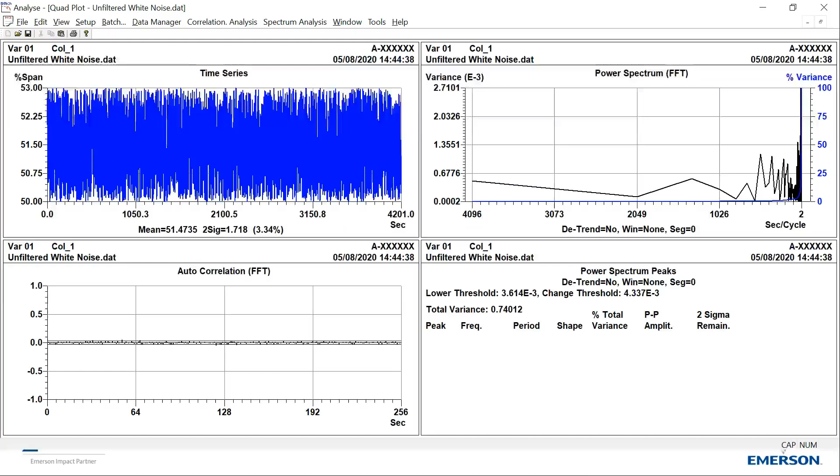So let's talk about noise itself. I'm going to use what's called the EnTech toolkit. So what are we looking at here? The upper side is the actual time series, the actual data as I collected it. What I actually did there is I just used the random function in Excel and imported it.

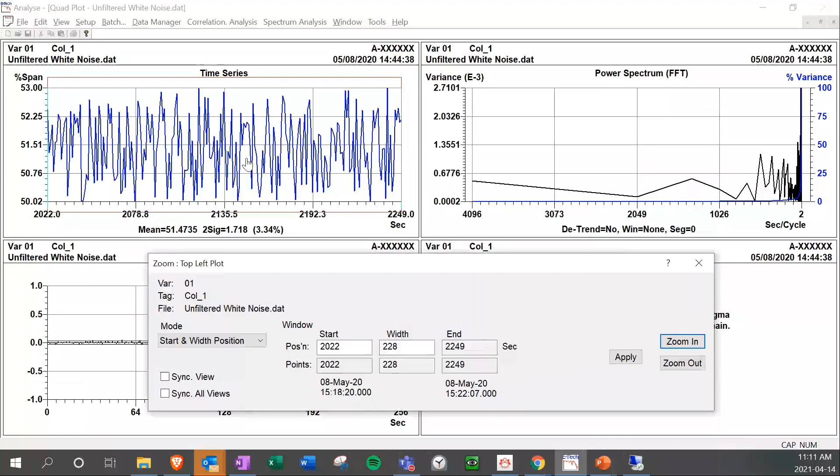You can see obviously here there's over 4,000 data points. I can zoom in if I want to, and there I just zoomed in, and you can actually see the actual variations of the signal right there. So let me zoom back out.

The quadrant on the upper right-hand side, that's called the power spectrum. And here we did a fast Fourier transform. You can do a fast Fourier or full Fourier. I'll explain why we're going to need this to determine the degree of noise here. But first, I want to explain what the fast Fourier will calculate.

Mr. Fourier said back in 1807, if I'm not mistaken, that any kind of time series can be reproduced by using a series of sine and cosine waves and adding them all up. So here we're actually dissecting it, looking at it in the frequency domain, and breaking it down to its fundamental harmonics.

Now, it looks kind of strange here because you can see that it crowds to the right-hand side. And that's because in the process control world, we deal with very slow cycles. It could be a 5-minute cycle, a 20-second cycle, a 1-hour cycle. That's why we tend to plot it in seconds per cycle, which is the inverse of frequency. You talk to reliability people, vibration people, they deal in hertz.

So what I'm going to do here is change the plotting, and go linear frequency as opposed to linear period. And you can see here now all the frequencies, all the harmonics, are equally spaced. I'll explain that blue line in a minute.

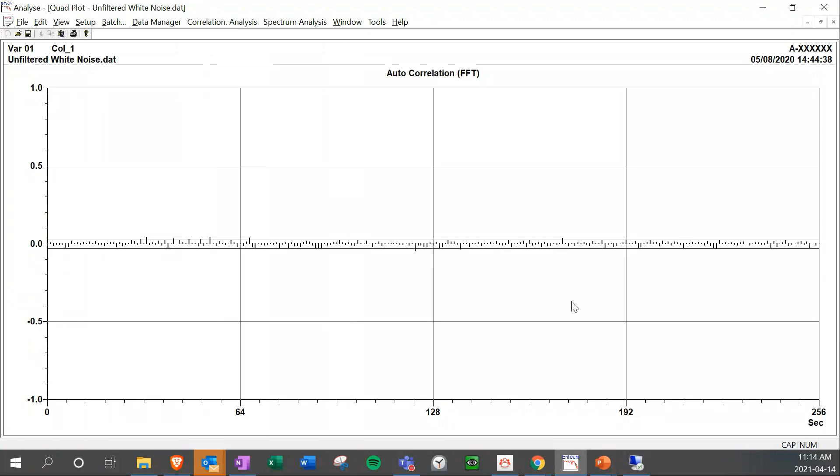So it's another indication that the signal is random and pure noise. One last thing I want to explain to you here is the blue line. So the blue line is actually the integration of all the actual harmonics being present within the power spectrum.

Now, there's a term called white noise. And white noise refers to when we actually see the color white, we actually are seeing all the colors in the visible spectrum at the same time. And so we can apply that to the signal. Here we're seeing equal amount of harmonics all across the spectrum. And so we see a straight line being applied right there.

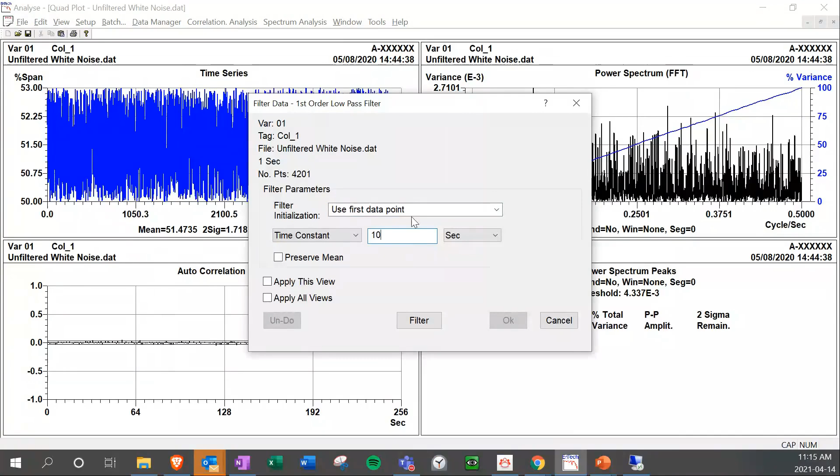So what I'm going to do next, I'm going to actually go here and filter this data, because this is what dampening is all about, is actually filtering. And it's typically a low pass filter. So I'm going to choose a low pass filter here, and I'm going to filter it at 10 seconds. So keep an eye on what's going to happen here as I actually filter it. So let me undo this.

So you can see here the variability number is 1.718. So when I filter it, I'm going to attenuate, I should say, some of the higher frequencies. It is a low pass filter. I'm going to filter it. And you can see here, the first thing you notice, the autocorrelation function now, we've taken away the randomness of the signal. And you can see there's actually some correlation within the signal. And the power spectrum, you can see here, we actually attenuated a whole bunch of the higher frequencies right there.

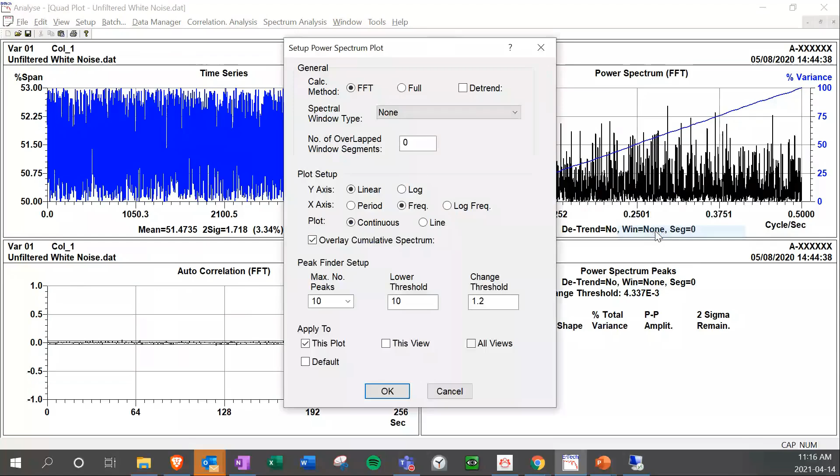And so if I undo this now, I'm actually going to change the plotting of the power spectrum to log-log. And why do we use log-log? We're able to handle a very wide range of data points, both in the x axis and the y axis, and plot it in a more reasonable fashion. At the same time, it makes exponential relationships look linear.

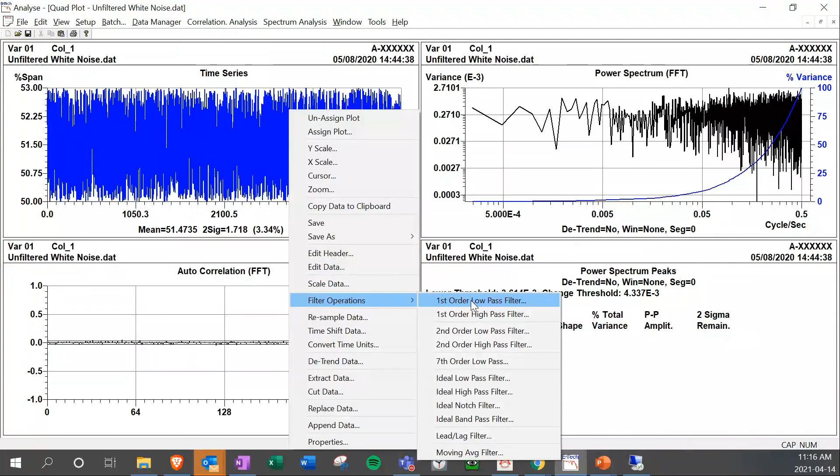So once again here, you can see the power spectrum is relatively flat all the way across the full spectrum. And once again, I'm going to actually filter this again, bring this back down to 10 seconds.

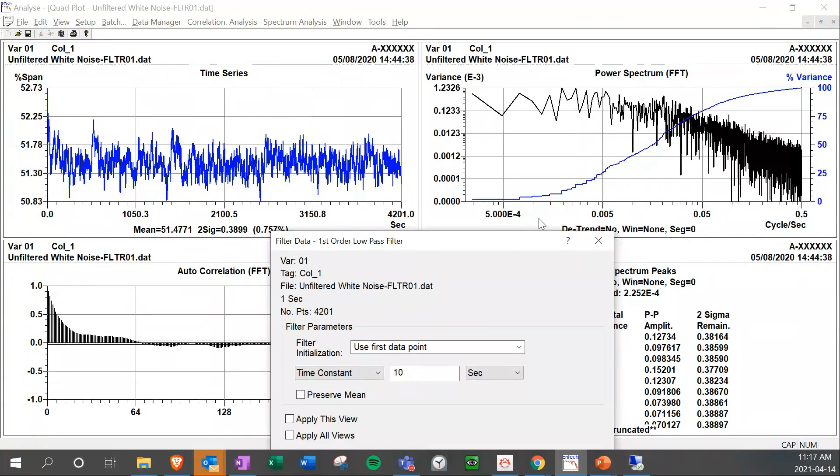And now you can see here, I'm starting to roll off over here. That means I'm starting to attenuate at probably minus 20 decibels per decade. I'm attenuating, and I can then back calculate what the cutoff frequency is by observing where the actual cutoff of that loop is. So I'm going to undo that. So that's a quick overview of what noise is all about.

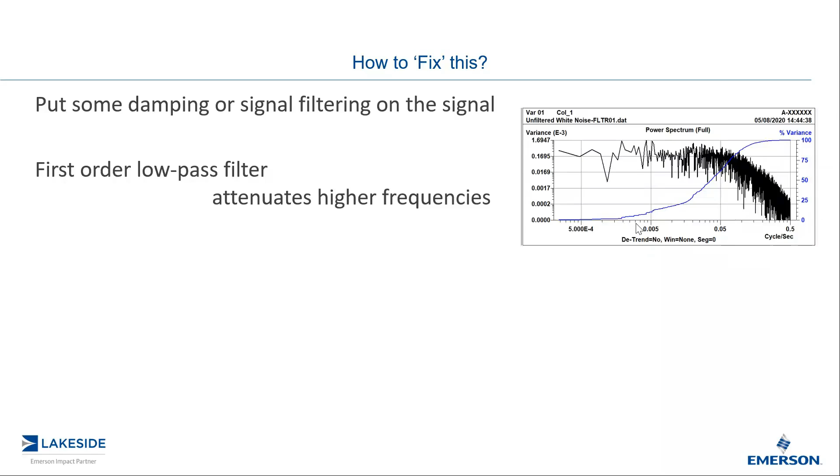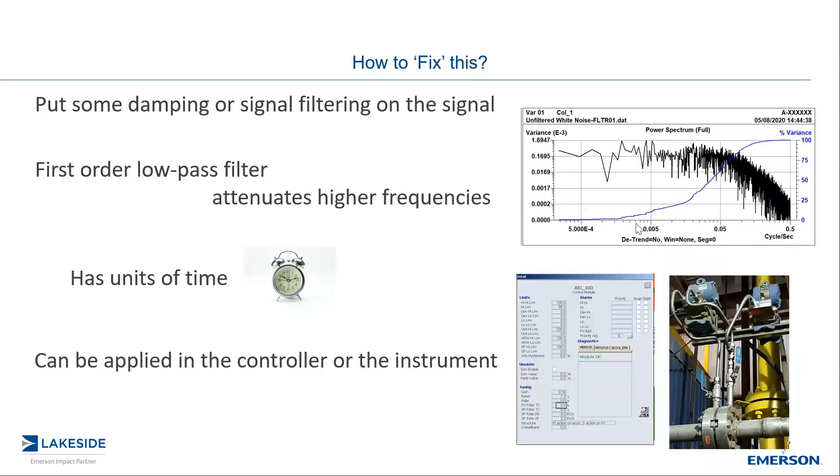So as I mentioned, we see noise, and we're going to put some dampening on there. And as I said, it's a low pass filter that will attenuate. Now, again, I want to emphasize, it does not eliminate, it attenuates. And so based on the frequency response, the cutoff period, or the cutoff frequency, the faster we get, the more and more those signals get attenuated. It has units of time, typically seconds, and you can apply it at the control system, or you can apply it at the transmitter. Where should you apply it, should you need it? We'll talk about that in a little bit.

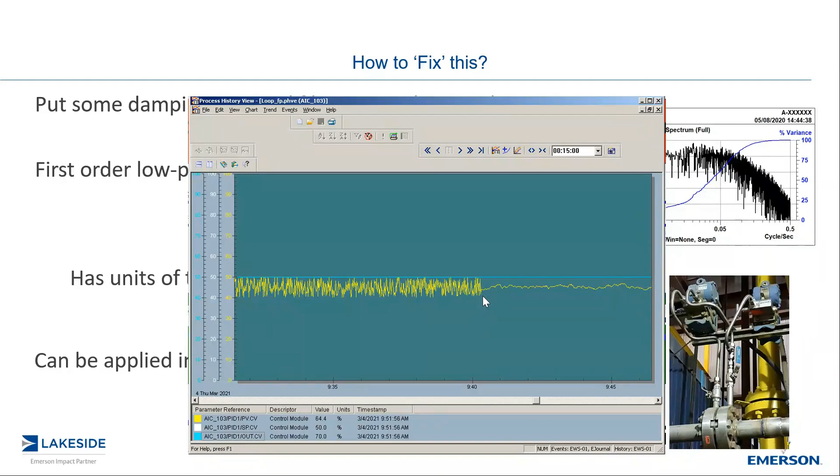And so this is just a display of what applying dampening actually does. So you can see here where I'm applying some dampening right here, and now the signal is a lot quieter. But really, is the noise gone? Have we actually eliminated the noise? And the answer is no. The noise is still there. We just choose not to see it.

Why do we do this? Most of the time, it's because we have the wrong type of transmitter specified, or not installed properly. Why do we do this? Because maybe, hey, I like flat lines. A lot of operators tend to like seeing flat lines, but there is a price to be paid for this. And obviously things look better, but are they actually better?

Let me tell you a story about when I was in a paper mill. It must have been 20 years ago now. And I was asked to do some bump tests on a flow control valve. And lo and behold, that flow took over a minute to settle out. And I knew right away, because obviously we've all brushed our teeth this morning. You open up the tap, you don't wait a minute for the flow to come up to full flow.

So flow controls are usually some of the faster loops in any kind of process, and so I knew there was something wrong. I did check the dynamics of the valve, and incidentally, my next webinar is about control valves, and the valve was responding very quickly. I then took a look at the installation of the flow meter, and this is exactly how it looked.

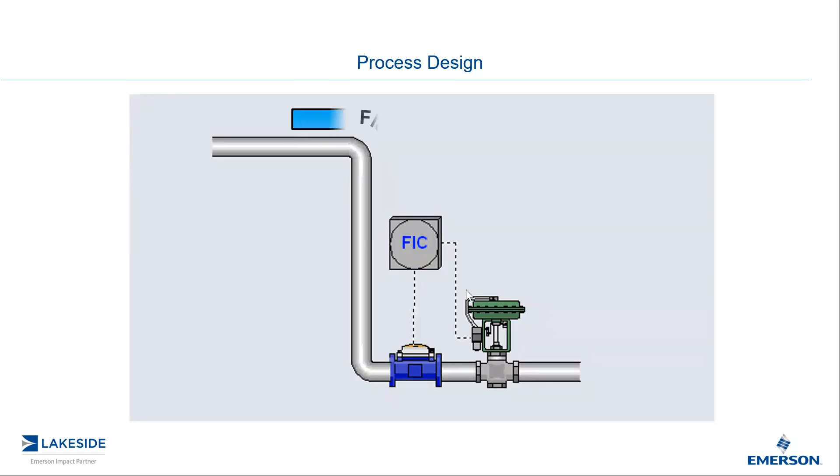Anybody know anything about mag meters? They're very sensitive to turbulence. So as the flow passes through, when it's flanged to an elbow, the actual elbow will create a lot of turbulence, which creates a very noisy signal.

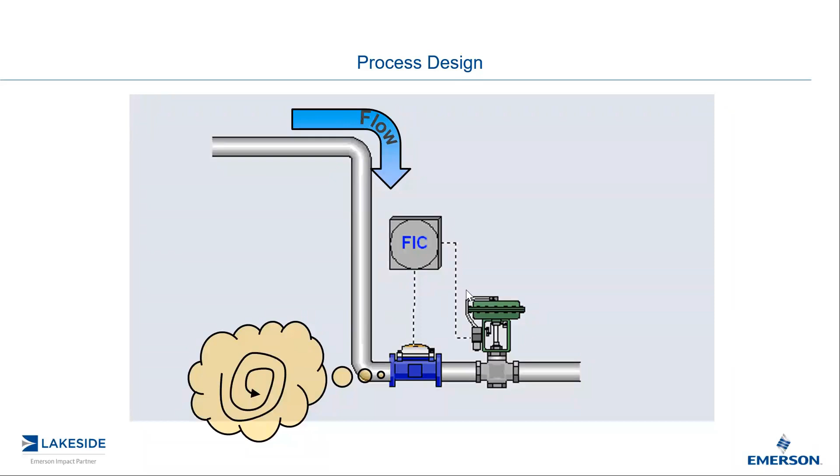You could just imagine that the piping person calls up the instrumentation person and says, you know what, I'm just drawing up the drawings for the piping. How much of a gap do you need for your mag meter? And the instrument person says, well, I need probably maybe 35 centimeters. And then lo and behold, the piping's all installed, and the instrument guy walks up to the piping with his mag meter, and that's what he's got. So a lot of times, bad process design creates a very noisy signal.

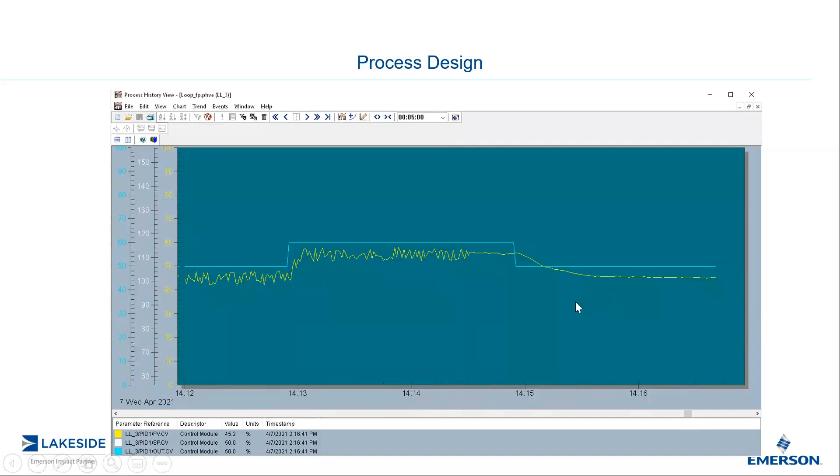And you can see on the left-hand side the actual true signal following a step change. The blue line is a command signal to the valve. This is what I usually do when I troubleshoot and tune control valves: I do bump tests. The yellow line is the actual flow, but what we were perceiving was the following bump, where you see it took a lot longer to settle out. So a lot of times signal damping, filtering, whatever you want to call it, will hide flaws in our design.

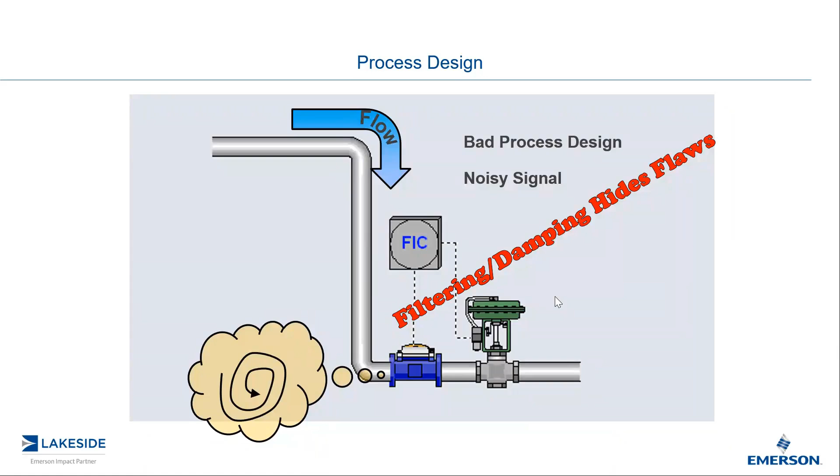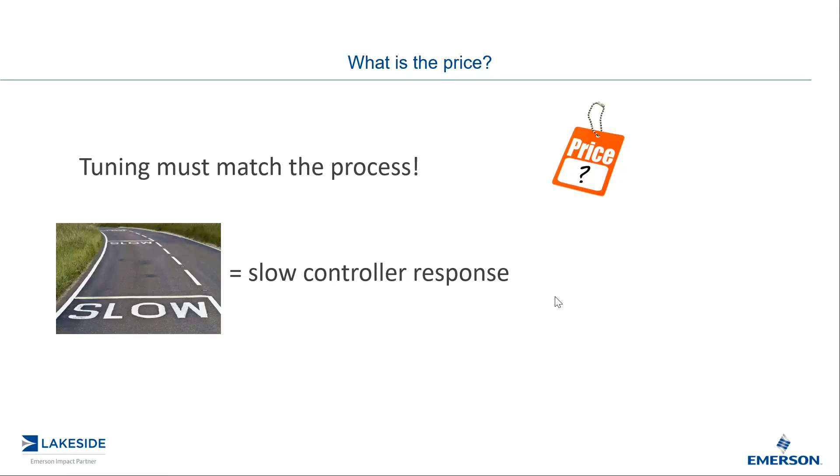So I'm going to show you a demo here that I actually developed. This is based on our DCS, just a very simple simulation. I've used these for other webinars as well. So here I have a controller. The yellow line is the actual PV to the controller; there are a few other signals behind it. The blue line is the actual command signal to the valve itself.

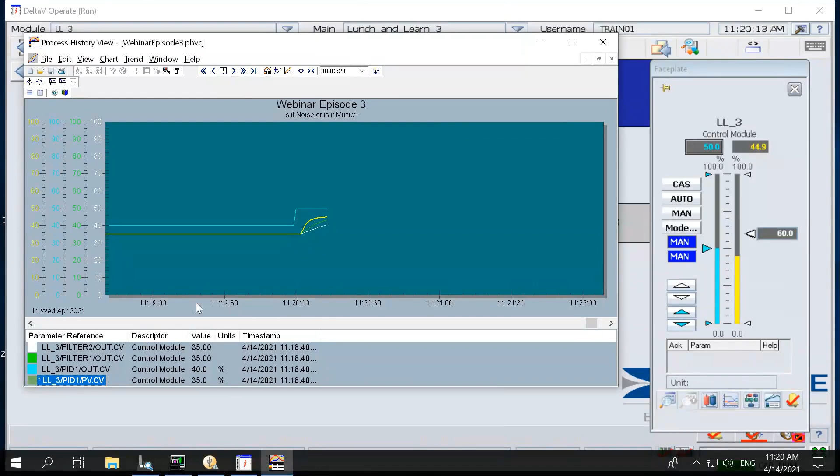I'm going to do a bump test and go from 40 to 50%. So there's my step change. I'm going to zoom in a little bit so you can see better what's going on. Now the yellow line is the actual process. The green line is reacting on the same signal, but with 5 seconds of filtering on it, and the white line has 12 seconds of dampening. You can see very clearly that the yellow line, the true process, has reacted, but as we add more and more filtering, we are slowing down our process.

So what else can we do here? Let's say I add some dampening to the controller. As I mentioned, we can add dampening at the transmitter or at the DCS. Here, I'm going to add it at the DCS: 15 seconds of dampening. Now I'm going to do an equal bump test back down to 40%. And now you're going to see that the yellow line is lagging behind the other two. I've slowed it down. It's even slower than the other two filtered signals, and it's obviously reacting a lot slower.

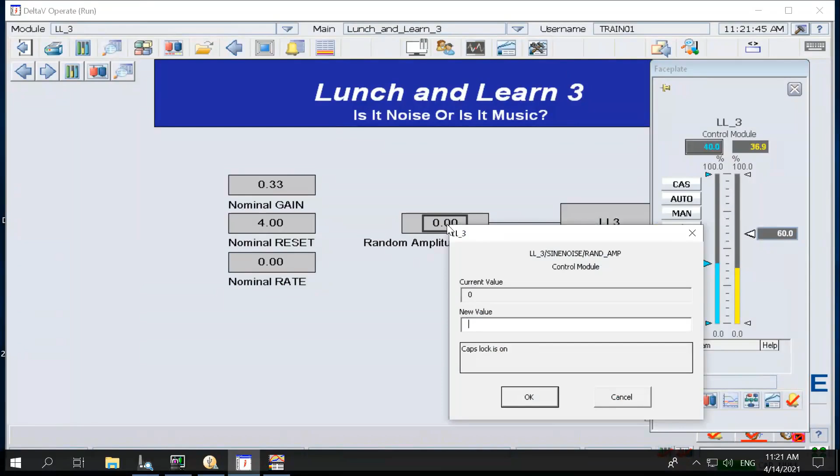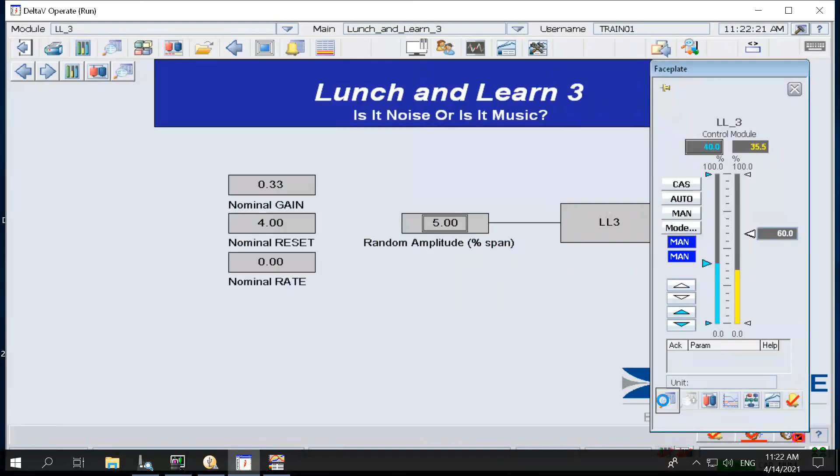So what else can I do? I can add some noise to this. I'm going to add 5% noise. Inside the DeltaV, we have a noise generator that we can add. Let me go back to 15 minutes here. So I've added 5% noise, and everything looks pretty calm because everything's filtered right now. Let me bring this down a little bit more just so we can see. Now I'm going to set the dampening, originally set at 15 seconds, to 0.

And now you can see here, there is actually a lot more bouncing going on. So that is a true signal. The other two are actually filtering. You can see the white line here, because it's filtered the most at 12 seconds, barely reacting, and the one at 5 seconds reacting a little bit right now.

So again, what I want to demonstrate: the more dampening you put in, the slower the response you're causing on your PV, on your process, and the consequence is it's going to force you to slow down your tuning.

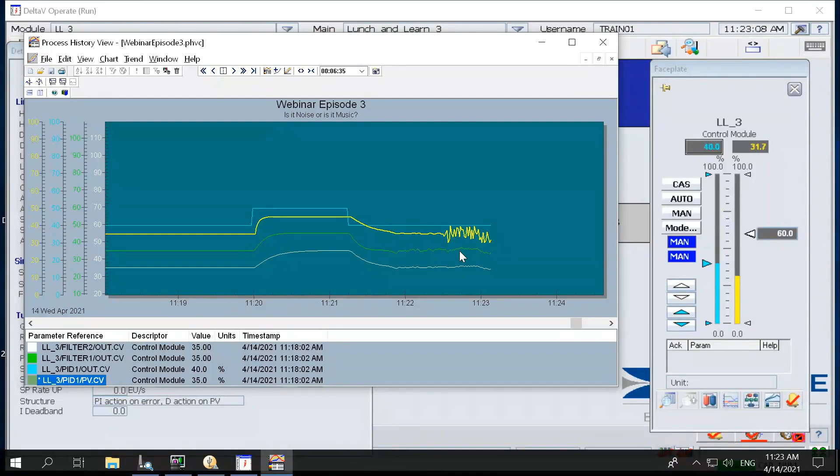So I'm not saying we should never. I always kind of discourage the use of dampening, because obviously we want to reveal all the warts, all the flaws out there, because then it forces us to actually address the situation. But there are situations where perhaps we do need a bit of dampening. This is typically any type of controller where the lambda tuning rule yields a high controller gain.

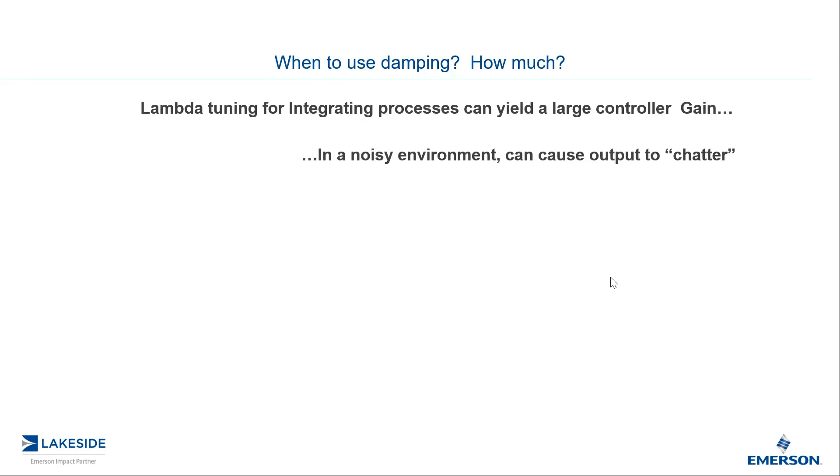Level controls tend to yield a higher controller gain and a slower acting reset. And a lot of times, especially in tanks, we'll use a pressure measurement to infer the level by measuring the static head. You could see this in an agitated tank, a lot probably in the pulp and paper industry, where the agitator is right in front of the level transmitter, causing pressure pulsations.

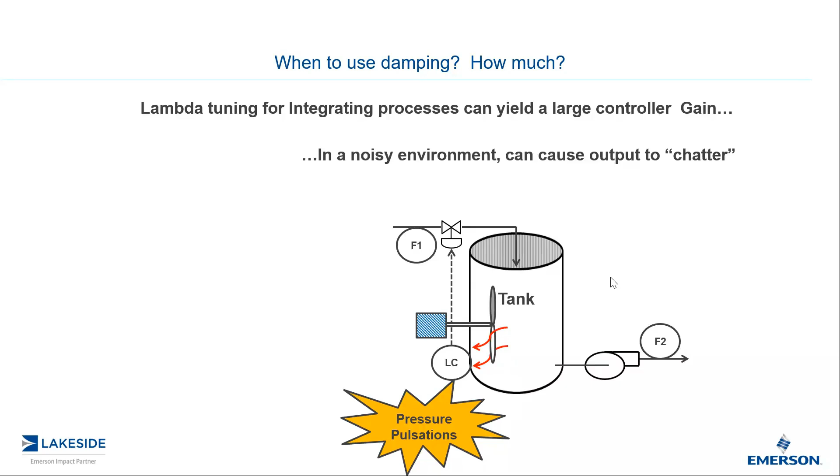What's going to happen then is that the signal will be noisy, and because of the high controller gain, the PID will react to that noise, and there's no value in reacting to that noise. The valve is going to move a lot back and forth, and we will probably prematurely wear out that control valve.

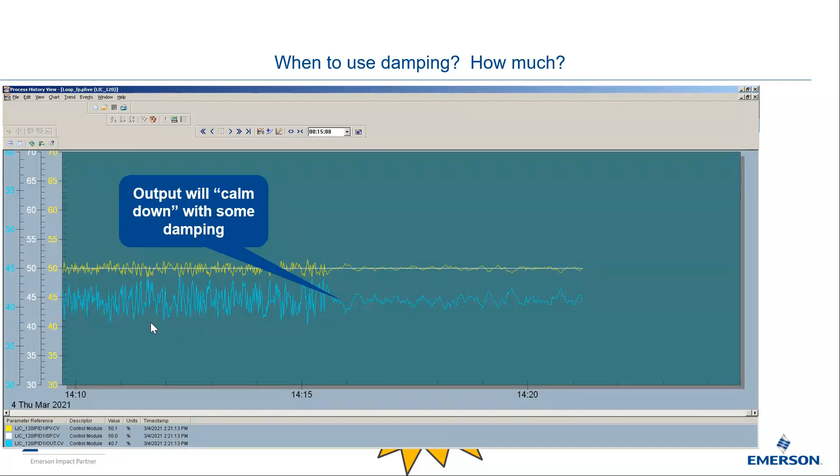So putting in a little bit of dampening on controllers that have high gains may not be a bad thing. We don't want to take away from the signal. We just want to eliminate the noise so that the controller does not react and we do not prematurely wear out the control valve.

And the more beta particles that get absorbed, the more dense the slurry is. That's how we infer it. But because of the completely random nature of the emission of beta particles, the signal will be noisy, and it does have to be quite heavily filtered to get a relevant signal.

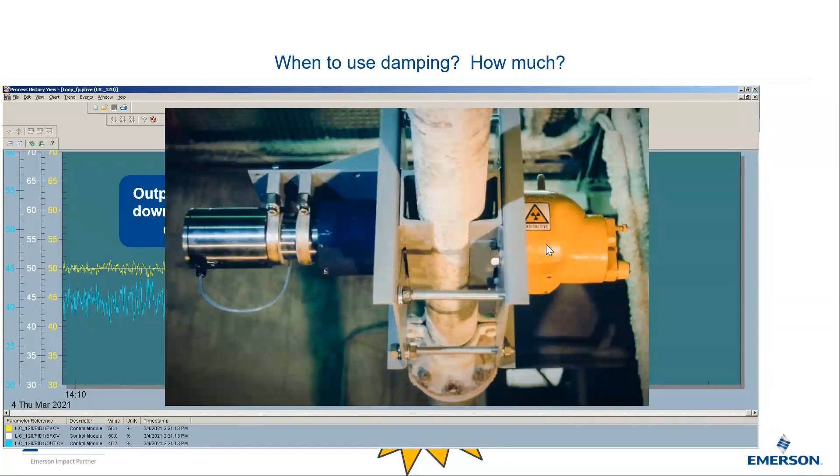So how much is too much? Typically, you tune a control loop using lambda, using some sort of closed loop dynamics. You want to put as little as possible. We recommend that whatever speed you tune your PID control loop, any kind of dampening should be 1/10 of that speed. We want to keep it as low as possible so we don't take away from the signal.

Now, as I mentioned, you can put the dampening at the transmitter or at the controller. The idea here is that if you are going to use it, put it in one spot and one spot only, and put it where it is the most evident and the most clear, where everyone can see it, and that is in the control system. Try not to put it at the transmitter because it can be kind of cumbersome.

It is more hidden. If you want to know if there's dampening at the transmitter, a lot of times if they're smart, you've got to get either AMS to pull up its configuration, or you need a 475 or a Trex HART communicator to be able to pull that off. Not as clear, not as evident. So if you are going to use a bit of dampening, I would suggest putting it at the DCS or PLC control system.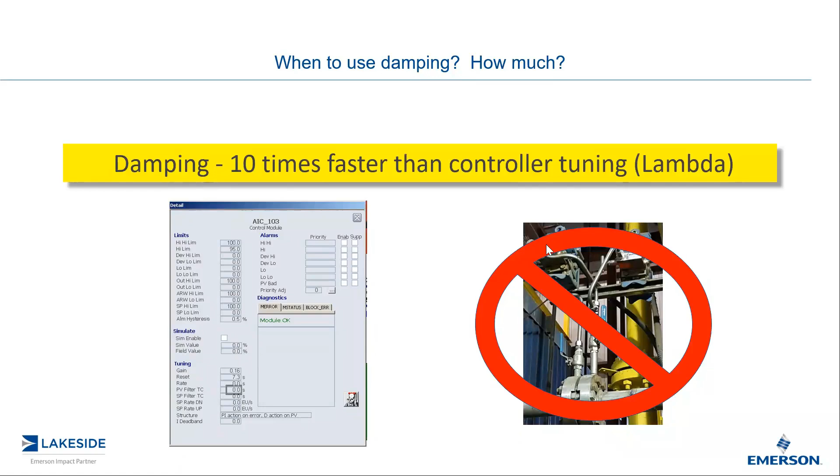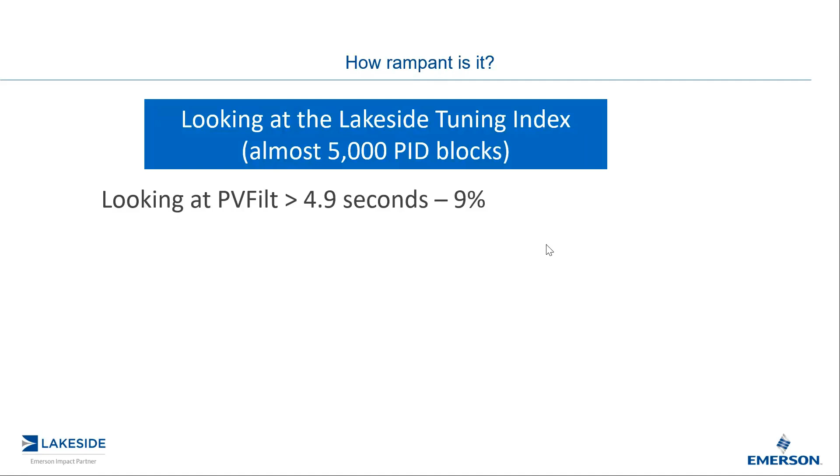How rampant is it? Well, some of you may recall I developed a Lakeside tuning index a few years back, and I've been using that information of almost 5,000 PID blocks. I've actually queried my database to see how many of the PID control loops have PV filtering, the dampening, at greater than 4.9 seconds. And 9% of the control loops, almost 1 out of 11, actually have what I consider an excessive amount of

dampening. By industry, food and beverage, 30% of the loops actually have an excessive amount of dampening. I don't know what that says about food and beverage, and pulp and paper as well. A little bit surprising there, 20% actually use an excessive amount of dampening. By loop type, not surprisingly, flow control is there, because every single type of flow measurement, with the exception of the Coriolis mass flow meter, requires a stable flow profile, which means that proper process design and installation design is required to get the maximum out of your flow measurement.

Now, level control, I'm kind of surprised by that. But then again, as I talked about, level control also yields a high controller gain. So it may require a bit of dampening to reduce any kind of output excursion that can wear out your valve.

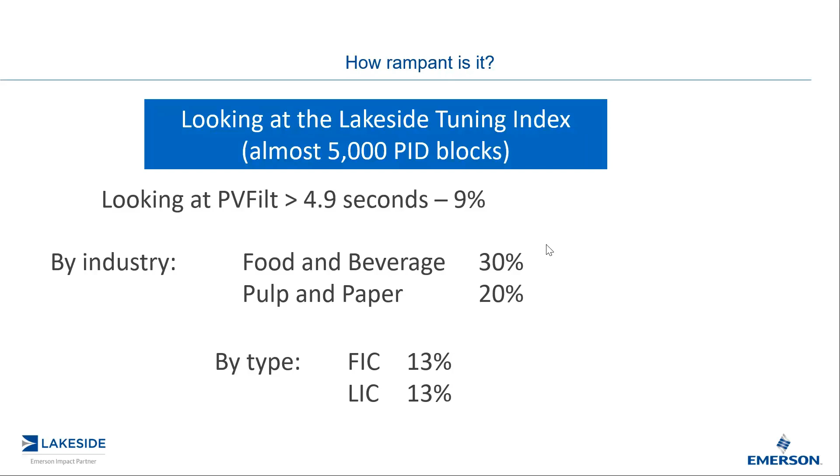So is it noise or is it music? We're finishing up now. We must take care of the measurement noise at the source. I've talked about this before: specified, installed, and maintained. And if we don't do those three things, we're going to have a bit of noise in our signal. So we need to take care of it so that our controllers can actually hear the music. So that concludes this. It's a fairly quick one today.